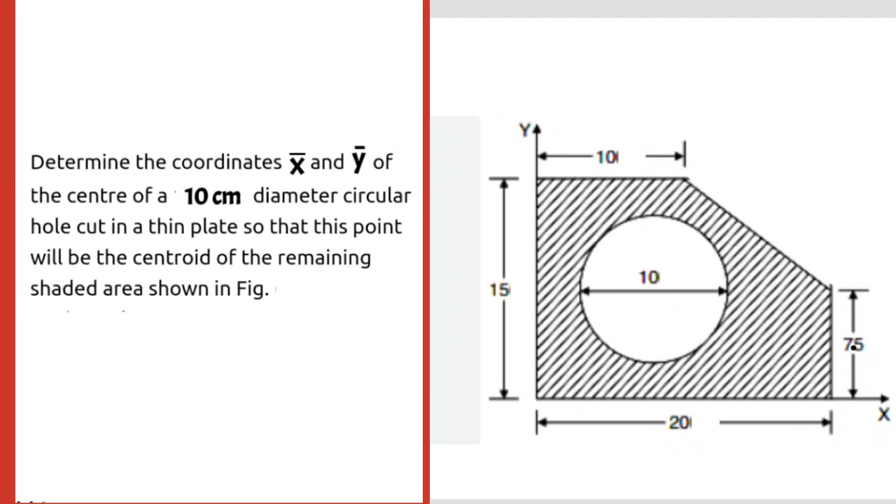Given question: determine the coordinates x bar and y bar of the center of a 10 cm diameter circular hole cut in a thin plate so that this point will be the centroid of the remaining shaded area shown in figure.

In this question, the centroid of the given shape as well as the center of the circle should coincide, and we have to find out the exact location of this centroid and the center of the circle.

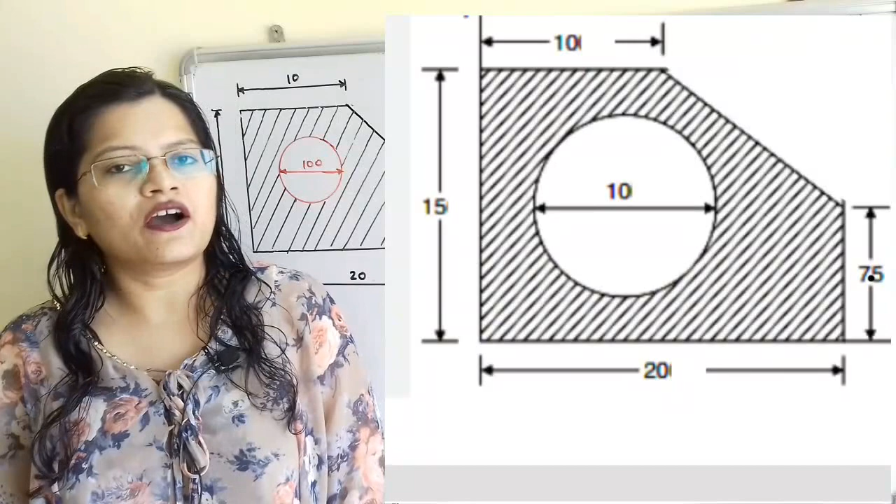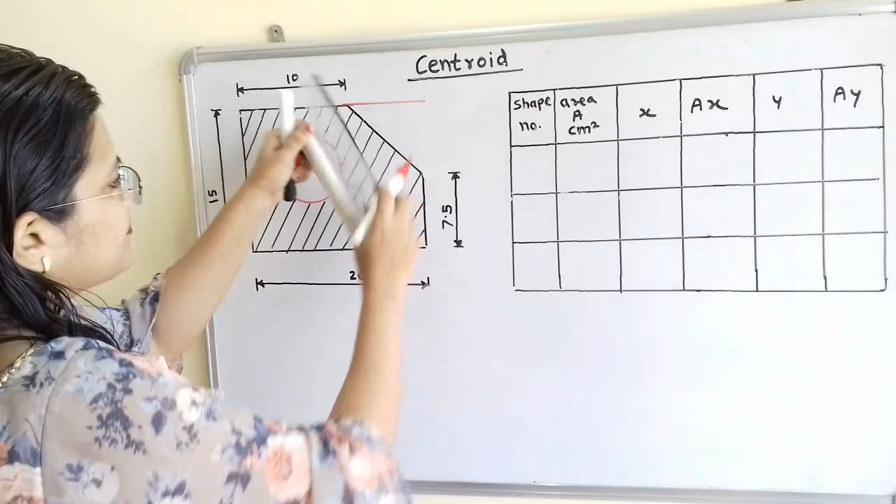How to find out the area of the given shape? For that we will make one construction. I will make here the rectangle form and extend this shape. If we observe, here is the rectangle, and from this rectangle, if I subtract the area of triangle and area of circle, then we will get the area of the given shape.

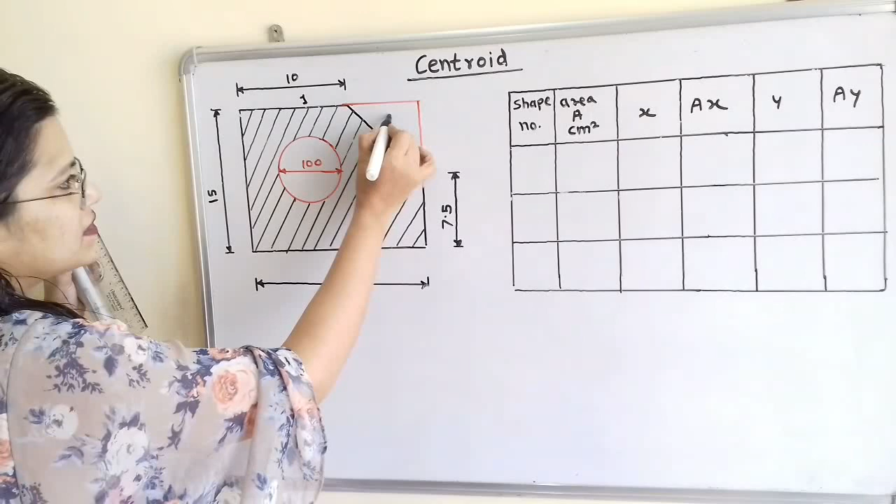Now we will give the numbers to the shape. If we observe here, this is the large rectangle, shape number 1. Then here is the triangle, for which we have to subtract the area, this is shape number 2, and for this circle we have to subtract this area also, this is shape number 3.

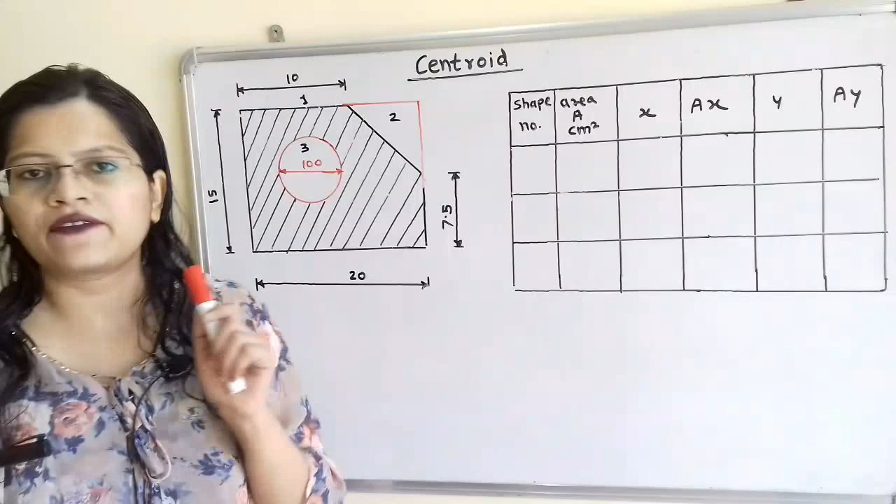Now we will follow step by step procedure. First step, we have to select the x-axis and y-axis, in such a way that this whole shape will be included in the first quadrant. So I will select here this bottom horizontal line as the x-axis, and extend this horizontal line. So this is the x-axis.

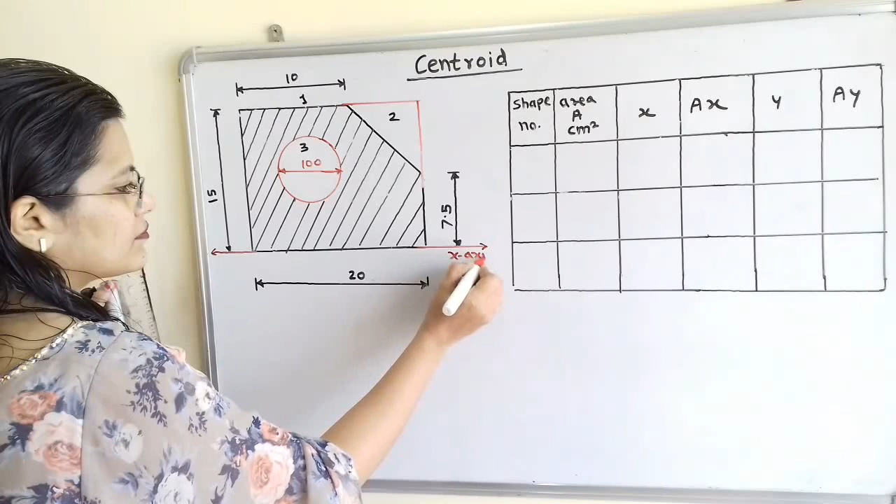And this vertical line as the y-axis. The point of intersection of this x-axis and y-axis is known as origin, O. Now the values on the right hand side are positive, values in the upward direction are also positive, values on the left hand side are negative, and values in the downward direction are negative. So if we observe, all the values or measurements for this shape are positive.

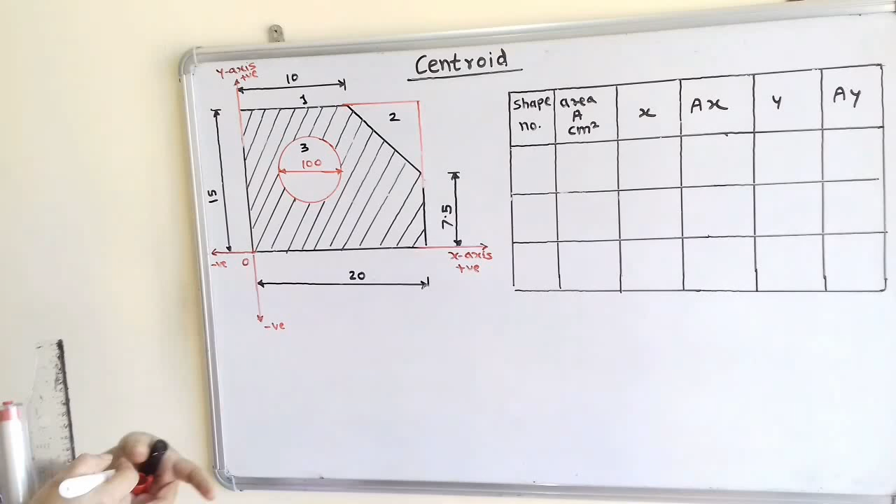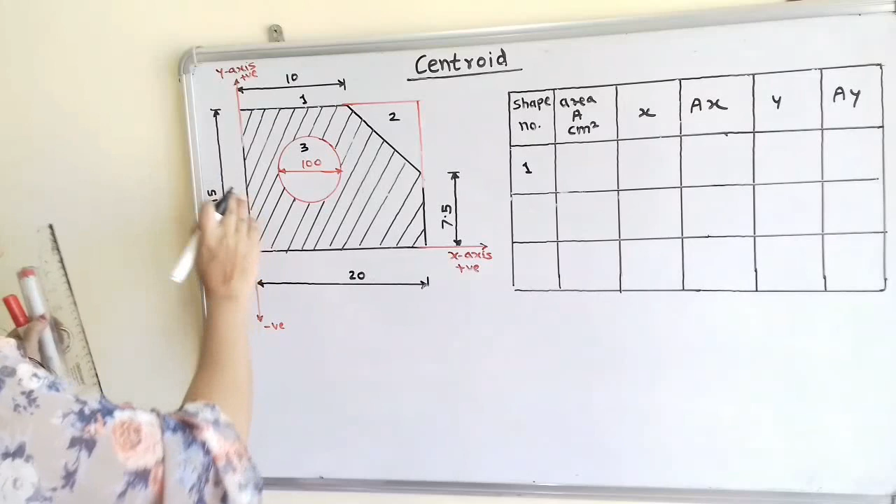Now we will move to the first shape. So we have to fill up this table: shape number, then area. For shape number 1, this is the form of a rectangle. So what is the area? Area is this length multiplied by this width, so length is 20 multiplied by 15, which gives 300.

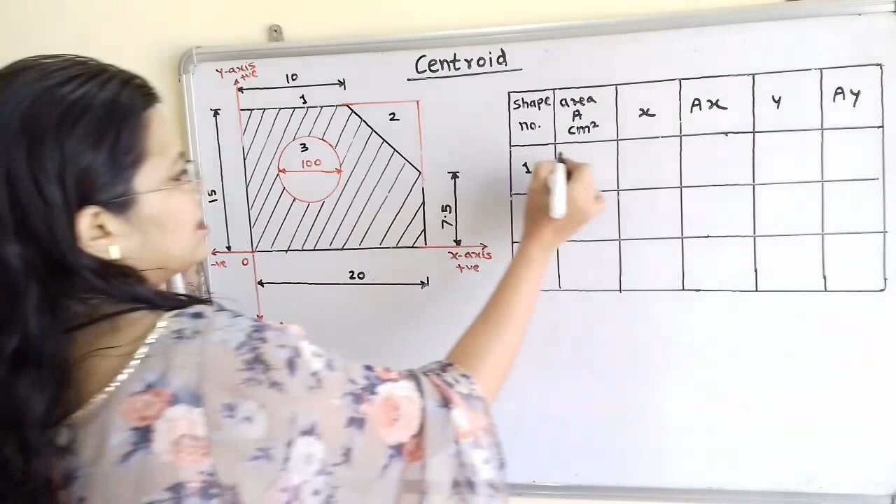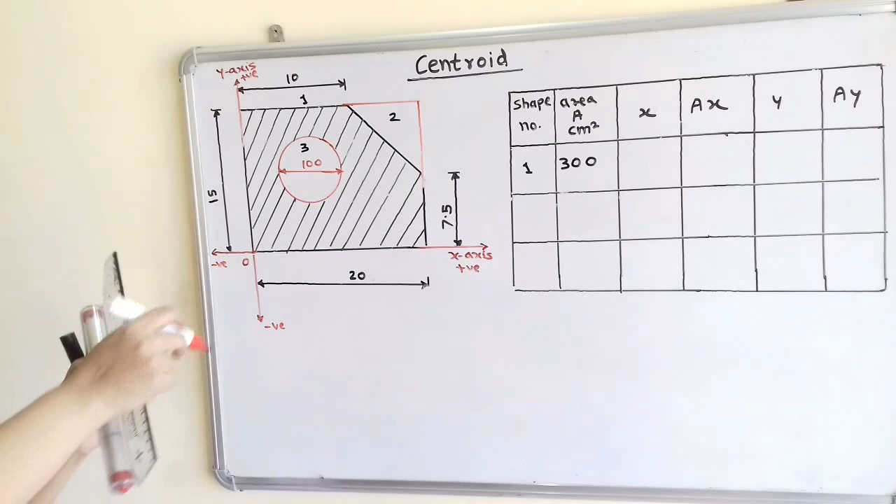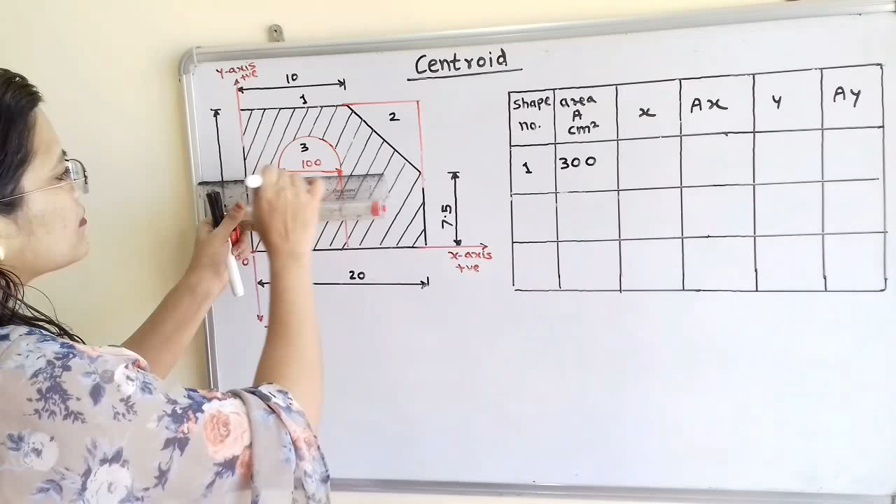Now how to find out the value of x and y? For that, first step, we have to choose the center of the given shape, selecting the middle point of this 20 and the middle point of this 15. If we observe, the point will be somewhere here, this is the center point. Now second step, we have to draw two perpendicular lines on the x-axis as well as the y-axis from the center, so I will draw the perpendicular lines.

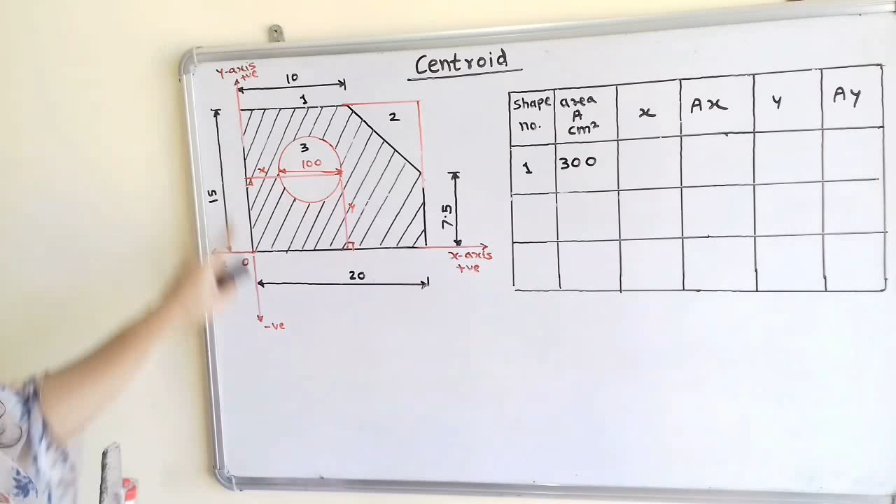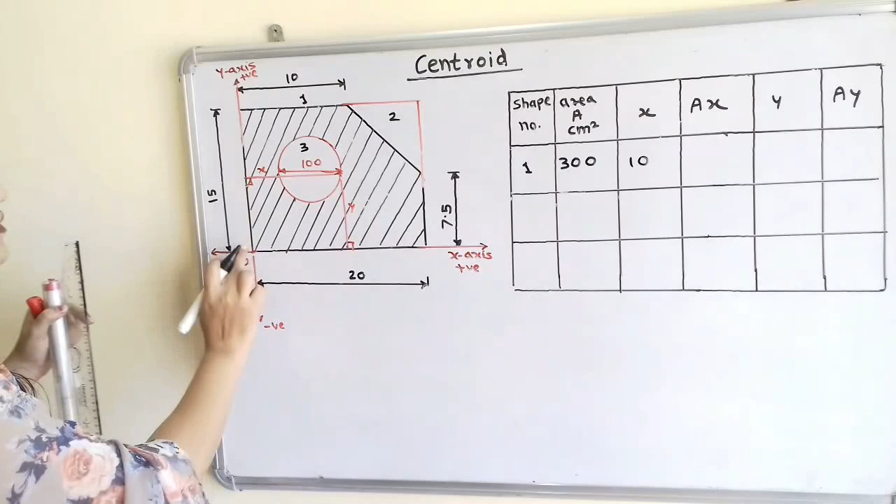Here are the perpendicular lines. Now this horizontal distance is known as the value of x, and this vertical distance is known as the value of y. So how to find out this x? If we observe, this x is nothing but the middle point for this 20, so x is equal to 10. And this y is equal to the middle point or center point of this 15, therefore y is equal to 7.5. Value of ax is equal to 3000 and value of ay is equal to 2250.

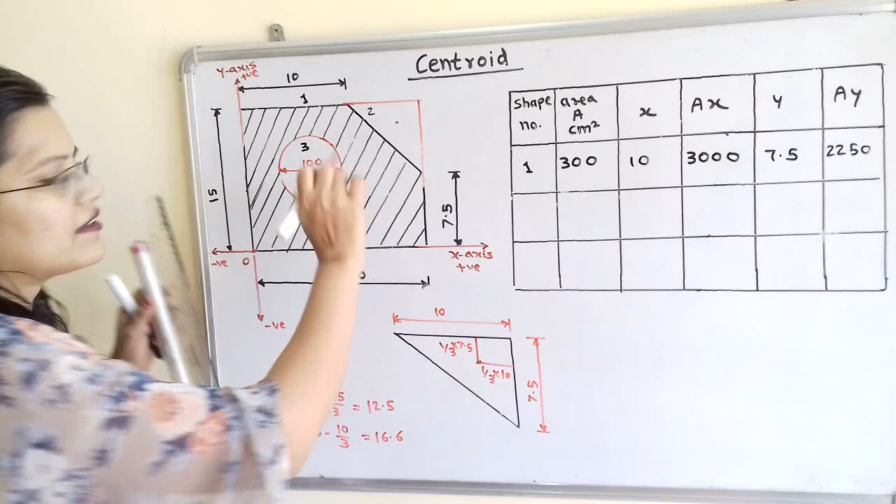Now we will move to shape number 2. Shape number 2 is the triangle. First step, we have to select the center of this triangle, so I will select here the center. Second step, we have to draw two perpendicular lines, one on the x-axis and other on the y-axis. So I will drop here the first perpendicular and the second perpendicular line. Now if we observe, this horizontal line is the value of x and this vertical line is the value of y.

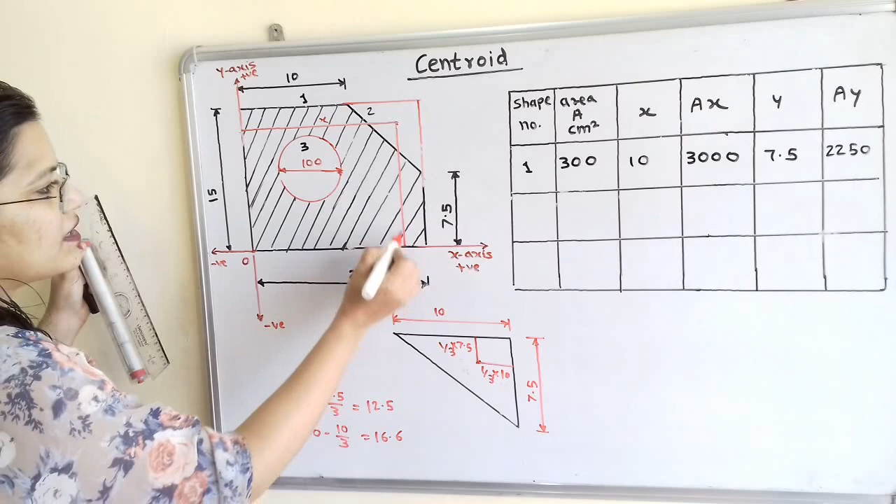For the shape of the triangle, what is the length of the height? That is total length minus this length, 20 minus 10 is equal to 10. And what is the length of the base? That is total length 15 minus 7.5, which is equal to 7.5.

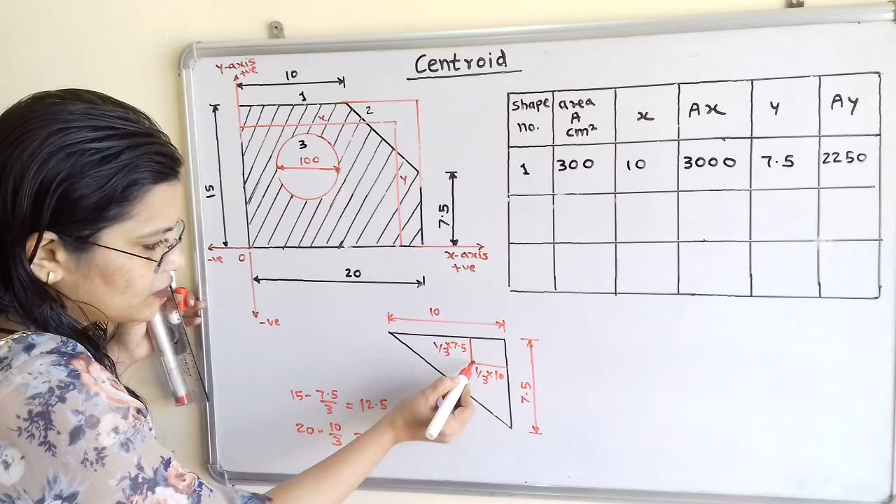Now if I draw the center and drop the perpendicular lines on the height as well as from the base, then what is this vertical distance? It is parallel to this 7.5, so we can take 1 by 3 multiplied by 7.5, that is 7.5 by 3. And what is this horizontal distance?

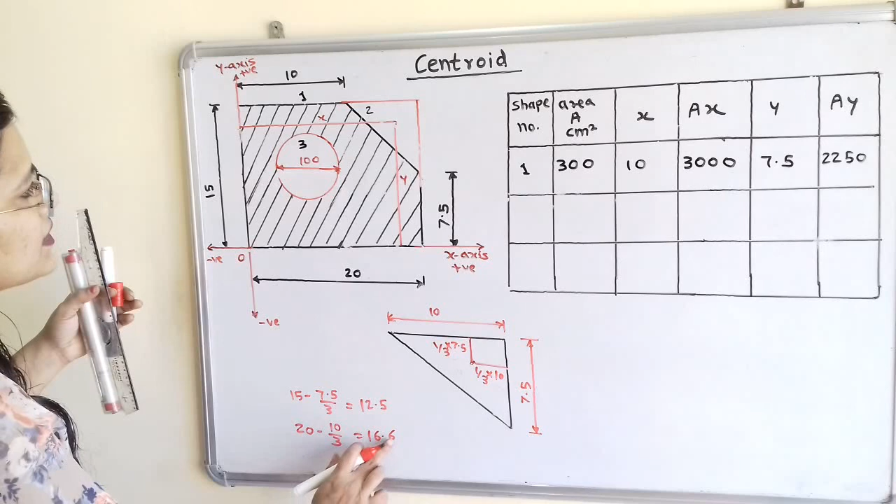So it is parallel to this 10, so we can say that 10 by 3. Now to calculate the value of x, how to calculate this? From this total length 20, minus this horizontal distance, that is 10 by 3. So 20 minus 10 by 3 is equal to 16.6. So this is the value of x.

So we have to write this. For the shape number 2, value of x is 16.6. Now how to calculate the value of y? From this total length 15, we have to subtract this vertical distance, that is 7.5 by 3. So 15 minus 7.5 by 3 is equal to 12.5. So value of y is 12.5.

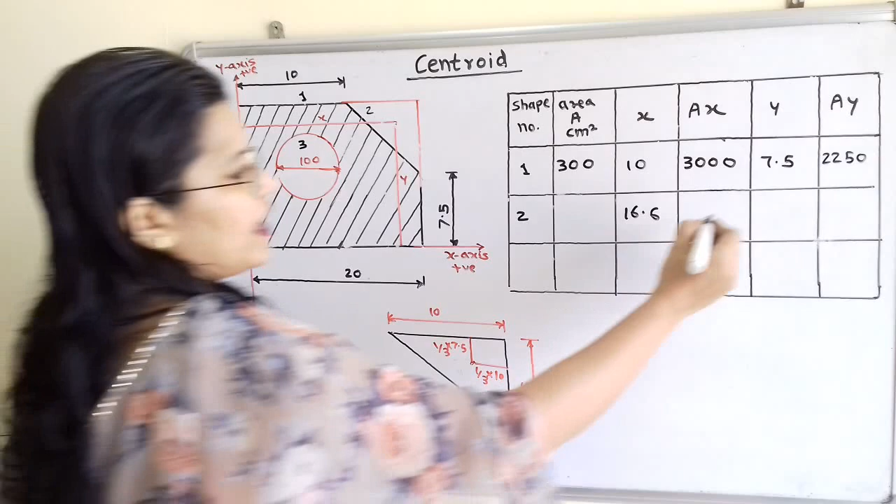Now what is the area of the triangle? Area of triangle, we know that half multiplied by base multiplied by height, that is half into 7.5 into 10, that is 7.5 multiplied by 5.

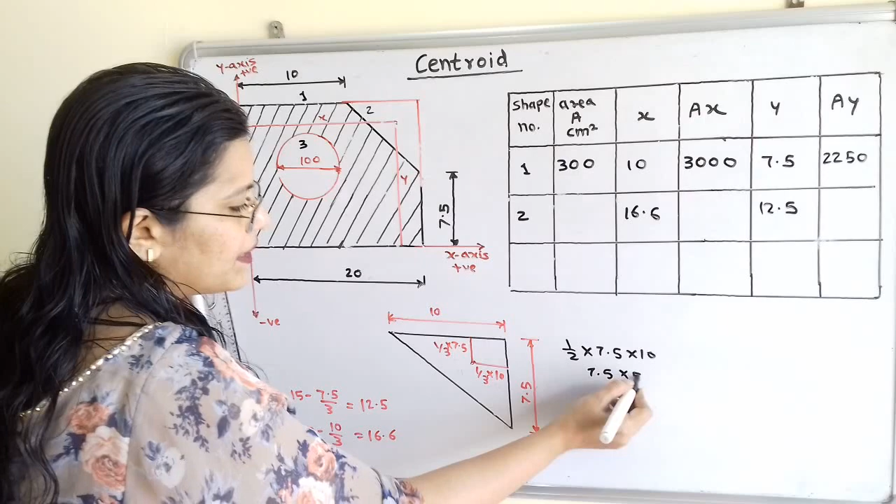Values of ax and ay are calculated for the shape number 2. Now we will move to the shape number 3, which is the circle of diameter 10 cm.

Condition is given: coordinates of the centroid as well as coordinates of the center of the circle should be same. Now the first step, we have to choose the center of the circle. So here is the center of circle. Now from this center we have to draw two perpendicular lines, one on the x-axis and the second on the y-axis.

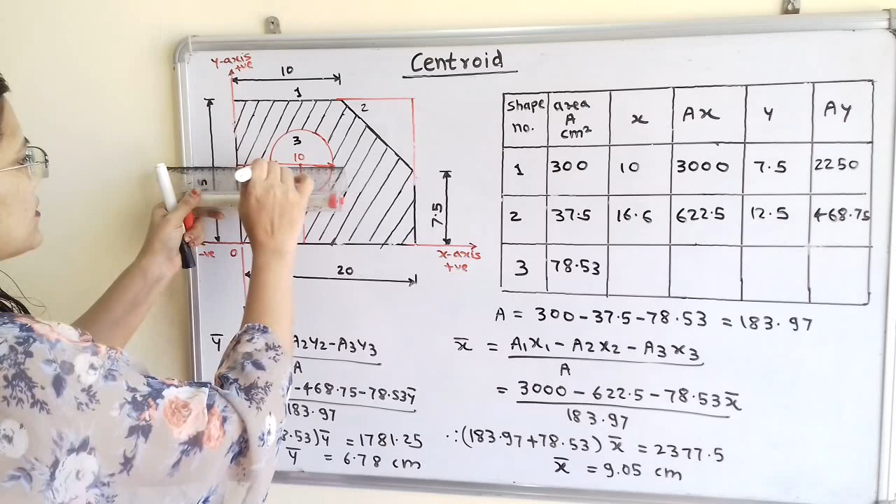Now for this horizontal line, we can say that the coordinates are same. So we will consider coordinates of the centroid as x bar and y bar. This horizontal distance is known as x bar and this vertical distance is known as y bar. So these two are unknown terms because we don't know the exact location for this circle, and we have to decide the location of the circle.

Now for the shape number 3, we will take here area A. So area of the circle, that is equal to pi by 4 d square, or we can say pi into r square. So pi multiplied by r, that is 5 centimeters, so pi multiplied by 25 is equal to 78.53.

Now value of x: value of x is x bar, and value of y is y bar. So ax is equal to 78.53 x bar, and ay is equal to 78.53 y bar. So this table is completed.

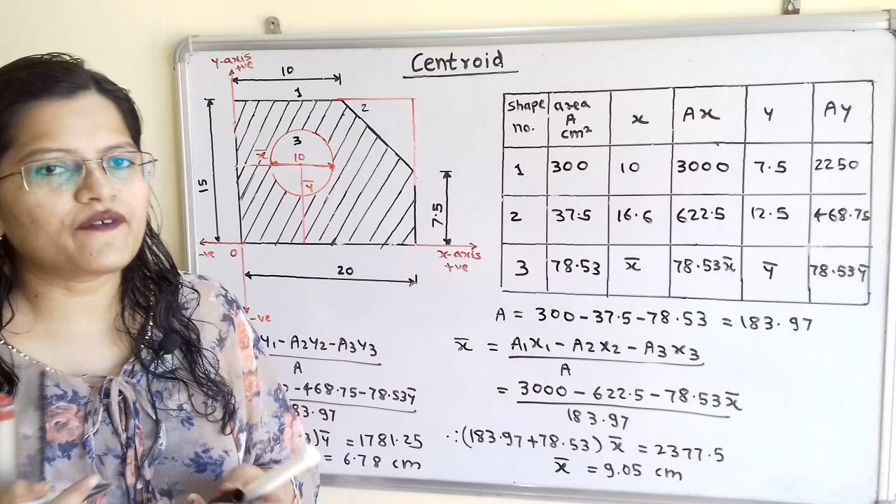Now we will find out the value of x bar as well as y bar. First step, we have to calculate the area of the shape. So if we observe, how to calculate area of given shape: that is area of shape number 1 minus area of shape number 2 minus area of shape number 3, that is 300 minus 37.5 minus 78.53, which is equal to

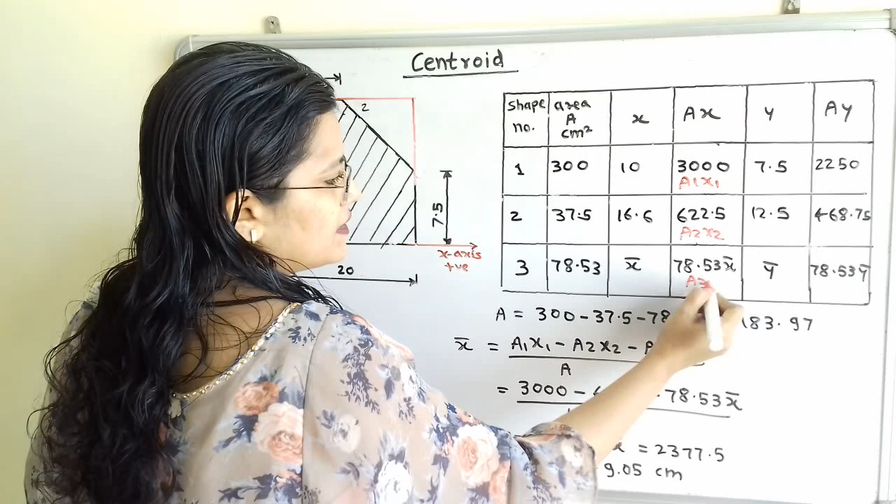183.97. Now we will calculate x bar. So how to calculate x bar? We have the formula: this is the value of a1 x1, a2 x2 and a3 x3, and this is a1, a2, a3.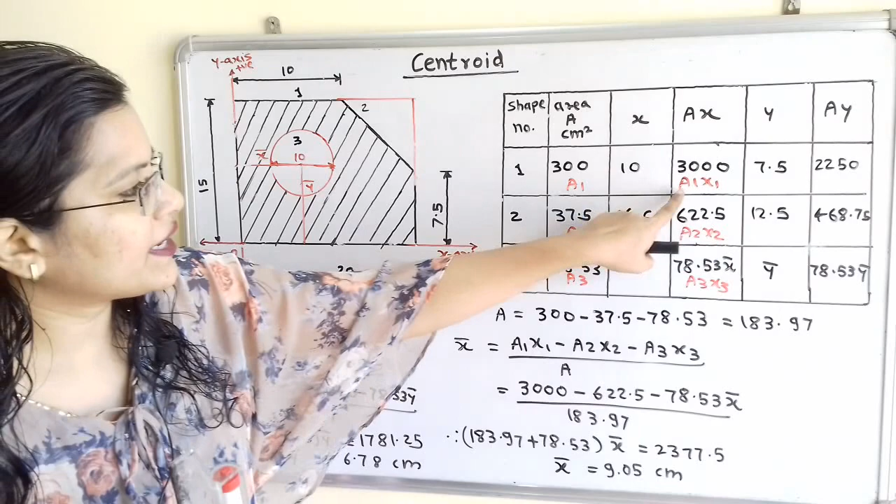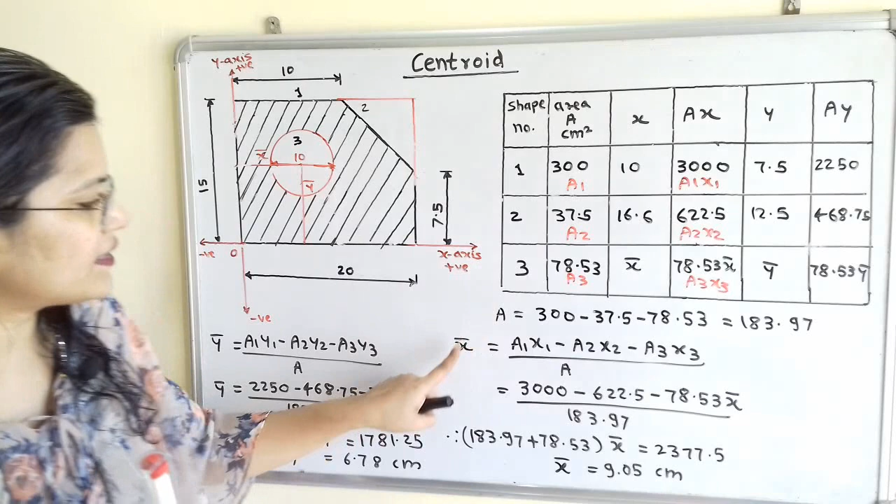So for x bar we have to calculate a1 x1 minus a2 x2 minus a3 x3. Why here minus sign? Because we have to subtract shape number 2 and shape number 3 for this given shape. So we will take the formula: a1 x1 minus a2 x2 minus a3 x3, divided by a1 minus a2 minus a3. Here a is 183.97. So when we put the value, we will simplify this because here is x bar and here is also x bar. So we will take the x bar term to one side and the other term to the other side, and we will get the answer: x bar is equal to 9.05 centimeter.

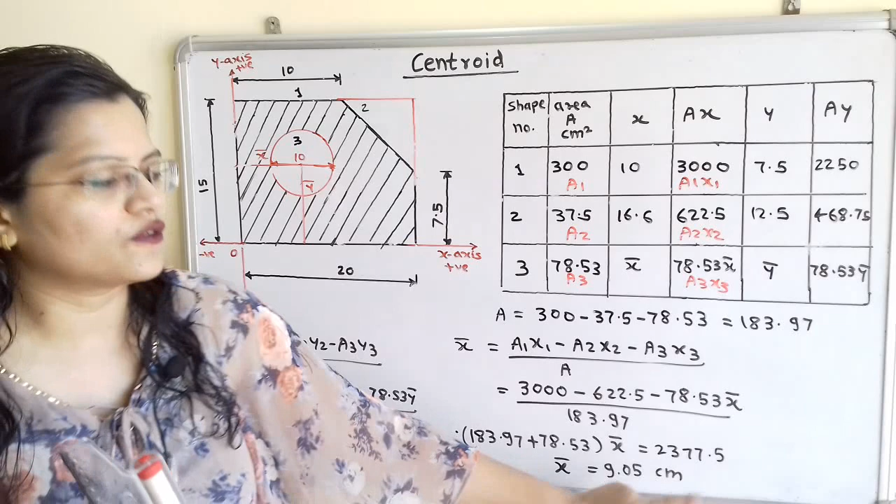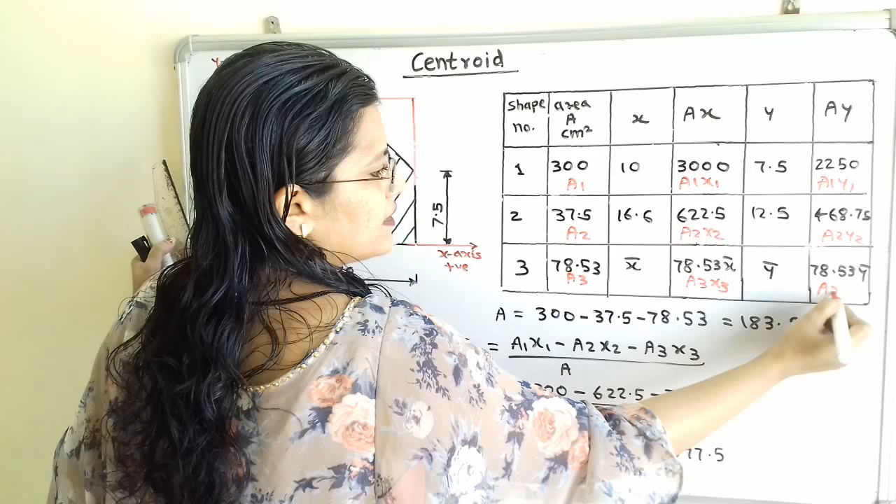Now in the same way we will calculate y bar. For that, here this is the value of A1 y1, A2 y2, A3 y3. So we can take that y bar is equal to A1 y1 minus A2 y2 minus A3 y3, divided by A1 minus A2 minus A3. Here the calculated value is 183.97.

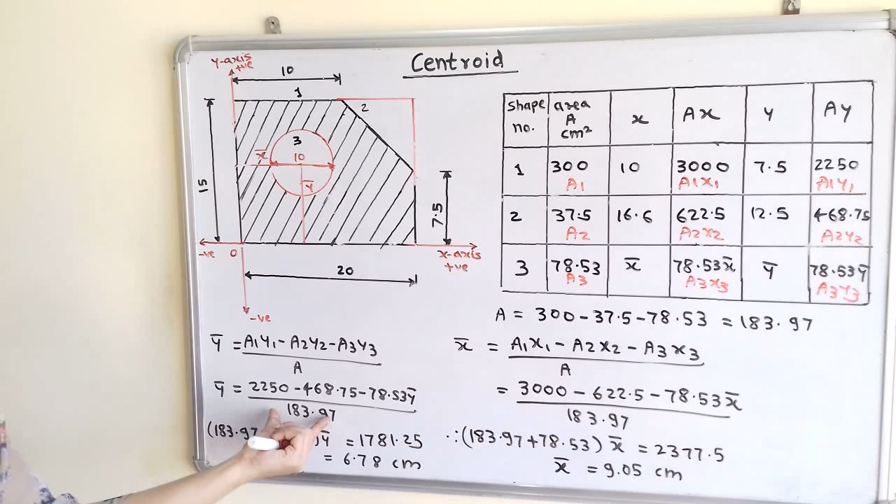So we will take here, and from the table when we fill in the value, there are also two unknown terms, that is 78.53 y bar, and on the left hand side there is y bar. So we will transfer this denominator term to the left hand side, and we will take this term with y bar to the left hand side. Then we will get the answer: y bar is equal to 6.78 centimeter.